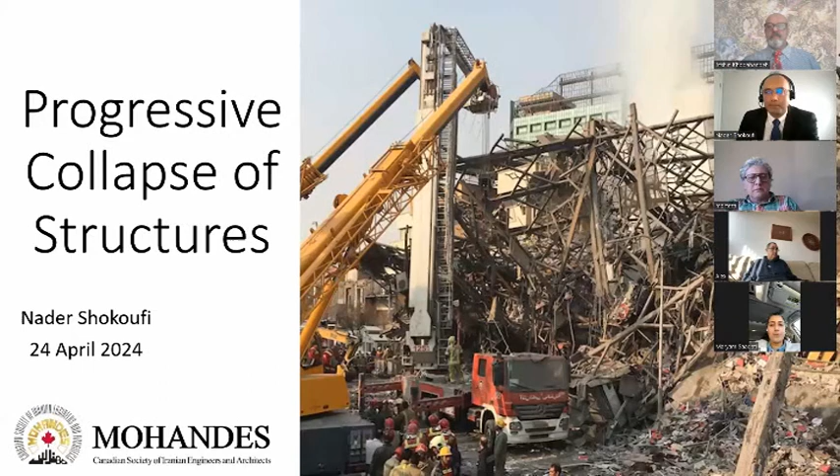I don't know how many of you are fans of crime TV series. Well, me, I'm a big fan. I've watched almost all crime TV series there are. And a common trend in these series is that there is a clever detective who goes around, gathers evidence, and finally, in a climactic moment, says, here's what happened.

Well, we have a similar approach when we're looking at a collapsed structure. We go around, gather facts, write some possible scenarios, do some analysis, and finally we would say, here's what happened. And from that, we learn some lessons that we will apply to our future designs, hoping to prevent a similar catastrophe from happening.

But that a posteriori approach is not all that we do. We also have an a priori approach in which we try to predict what might happen and prevent it from happening.

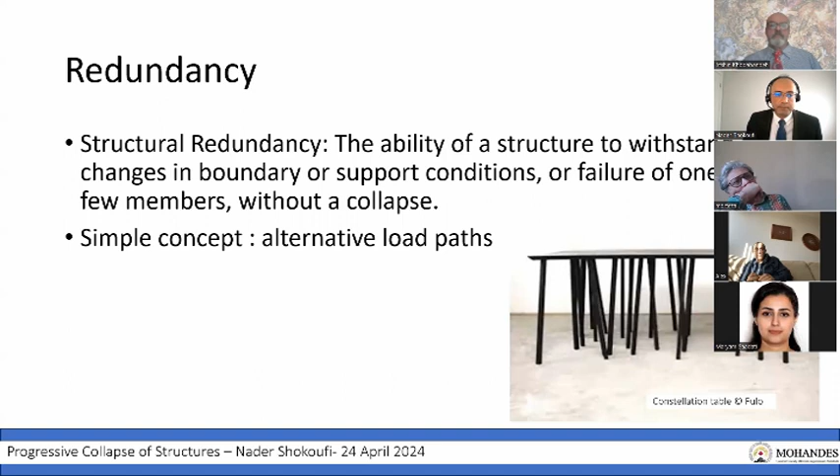I will be using the words collapse and failure a lot during this presentation, and I would use them sometimes interchangeably, but there's a slight difference between these two. So, for example, a beam that has been cracked beyond...

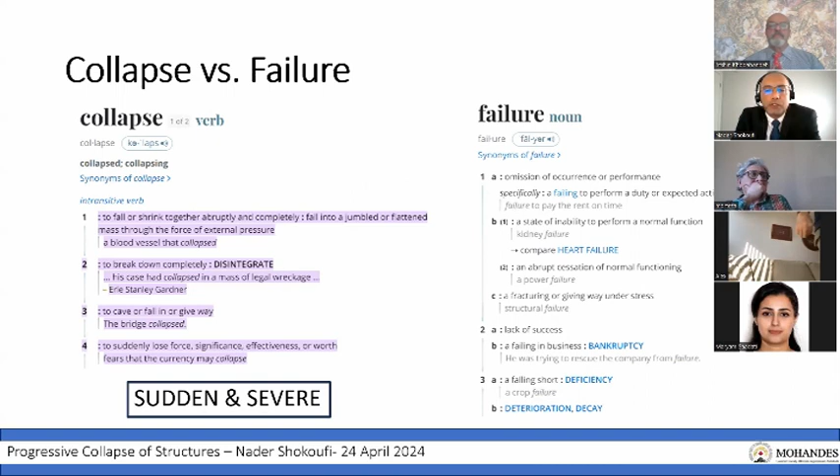There are different definitions, one from an AISC document and another from the GSA, the General Services Administration, both American institutes. Keywords of both definitions are that the final collapse is disproportionate to the triggering event, and that there is a sequence of collapses. The AISC defines it as collapse of all or a large part of a structure precipitated by damage or failure of a relatively small part of it. So it considers what triggers it as a small event, and there's a chain of events, some sort of butterfly effect, where a small event somewhere causes a very large result elsewhere.

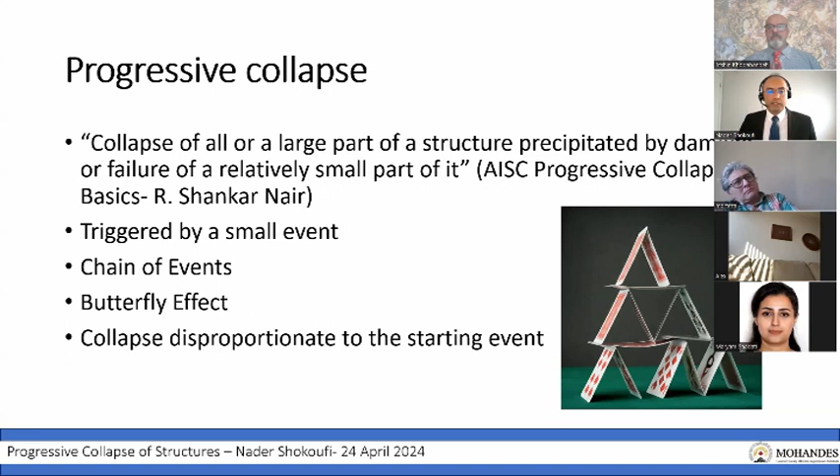The definition by GSA is very similar to that, and I will be quoting the GSA a lot during this presentation. It goes on to define progressive collapse as a situation where local failure of a primary structural component leads to the collapse of adjoining members, which in turn leads to additional collapse.

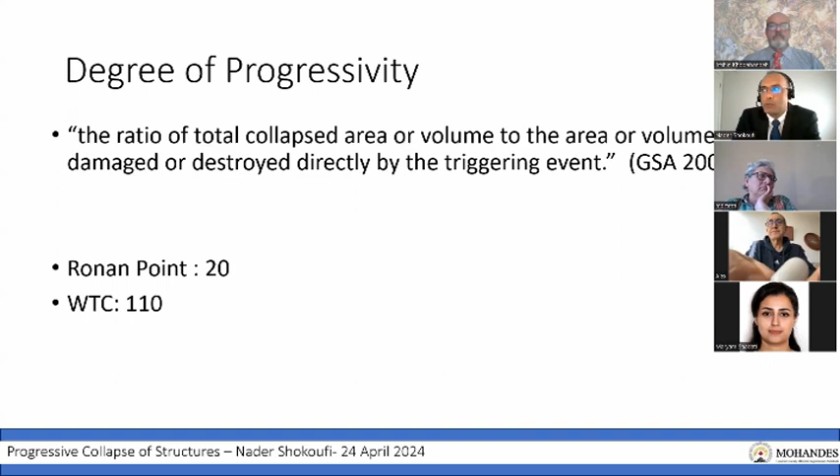I mentioned that a progressive collapse is one where the final damaged area is disproportionate to the triggering event. To measure the level of disproportionality, we define a term called degree of progressivity, which is the ratio of the final damaged area to the initial collapsed area. For example, for the Ronan Point building, which we'll see later, this degree is 20, and for the World Trade Center, also discussed later, it's 110.

Progressive collapse is not always avoided, and we sometimes look for it intentionally, especially for controlled demolitions. Here is an example of it. Unfortunately, I don't know where this structure is or what the original source of the video is—I just saw it somewhere on Instagram.

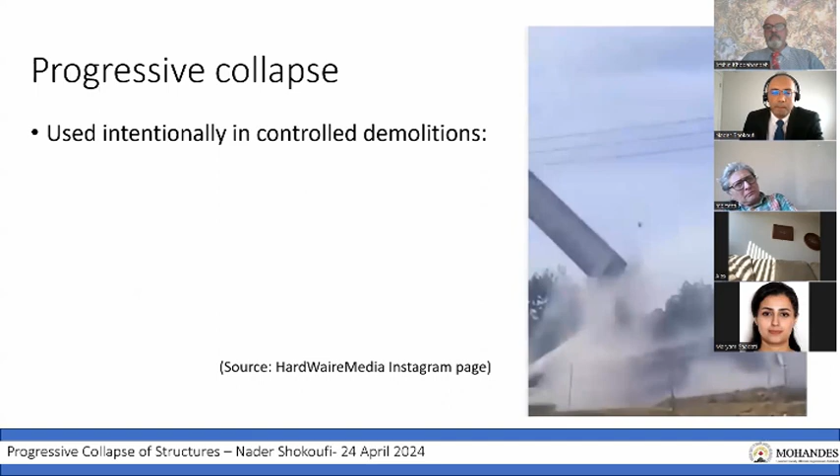But most of the time, progressive collapse is not that soothing side of intentional controlled demolition, and it's mostly a catastrophic event. I apologize for sharing this video, which might be a painful reminder for some of us of the horrific collapse of the Metropole building in Abadan, which resulted in 43 deaths and scarred the nation. I will not discuss the collapse in this presentation, but I will note that the incident mostly highlights the importance of professional ethics. Almost every stakeholder in this project, apart from the original consultant and partly the inspector, gravely neglected their duty to the public, and there were huge errors in design and construction of the project—errors severe enough to make the demise of this structure inevitable.

So I will now review some historic cases to help us understand what has happened and how we might be able to prevent similar events in the future.

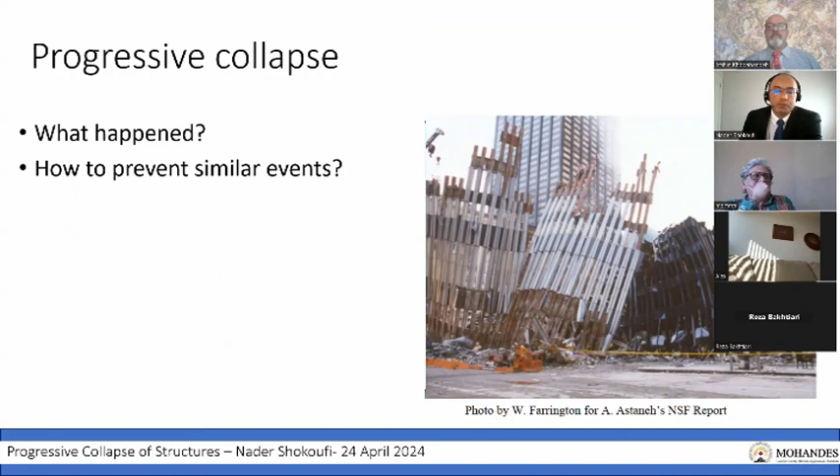But in real history, those of you who have traveled to Venice might have been amazed by the beauty of St. Mark's Square and its majestic bell tower. What you might not know is that this Campanile Tower was fully destroyed in 1902, and what we see today is not the ancient tower, which was nearly a millennium old, but a replica rebuilt in 1912.

The original tower took more than 200 years to be built to its current height, and it was built mostly as a watchtower. Later, in the 16th century, it was turned into a bell tower, and it was damaged several times during its lifespan, mostly because it was struck by thunder.

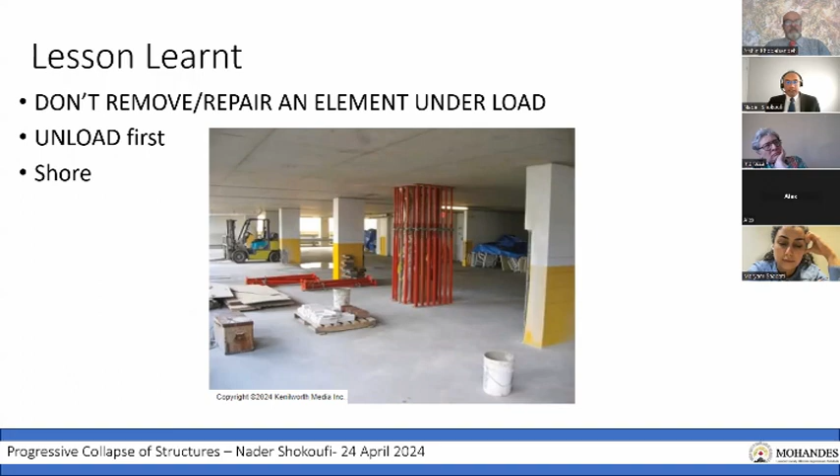The collapse of the zoology building of Aberdeen University in Scotland is the first recorded instance of a progressive collapse in a steel frame structure. The building was six stories tall, with a steel frame and concrete floors.

The collapse happened during construction, when a handful of construction workers were working on it during a severe wind. There were investigations by the Sheriff of Scotland and also the Parliament of England, neither of which I could find in the UK National Archive. But newsreels mention a summary of the report claiming that faulty connection welds were to blame for the collapse.

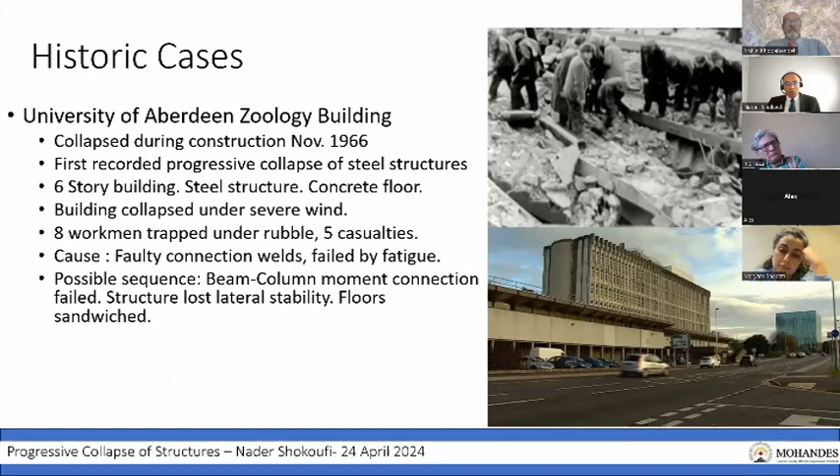I would have loved to see the official report for this collapse, because it seems curious how connections that experienced only a few cycles of loading during their short lifespan reached the point of fatigue failure. I also wanted to see if there had been any temporary bracing during construction that might have prevented the collapse. But it seems that if either of these two had been considered—temporary bracing, or connections designed for fatigue—this could have been prevented.

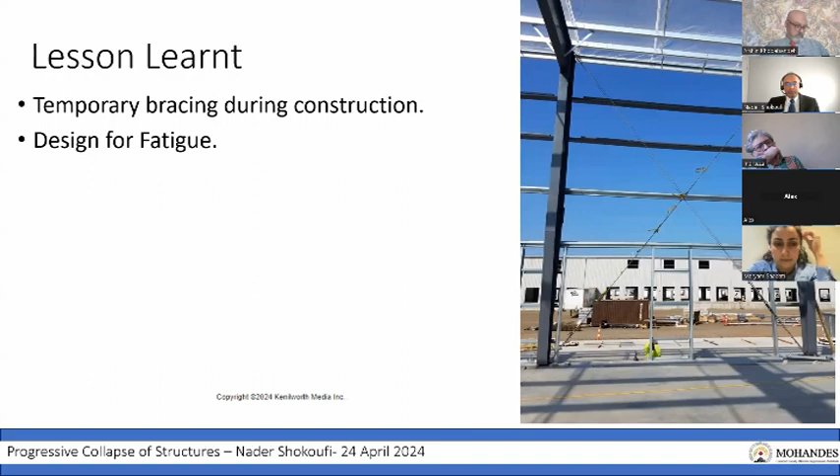This is the event that had a huge impact on the whole concept of progressive collapse: the collapse of the Ronan Point building in London in 1968. The building was a tall, 22-story residential building built with tilt-up large panel precast walls and slabs, and it was known at the time by the name of the Danish contractor company Larsen Nielsen.

They were the company that invented the system, and that system was used thoroughly all around Europe at that time, even till the 2000s. It was a perfect choice for that era, since almost a fourth of residential buildings in the United Kingdom were destroyed during World War II, and there was a dire need for mass construction of residential spaces. At the same time, a large workforce had moved into industrial jobs, leaving a shortage of construction workers.

So several buildings similar to this were being built all around the United Kingdom, five of which at the exact same time with the exact same design. The collapse happened just two months after the building was populated.

A small gas leak in the 18th story caused a small explosion in the kitchen. This explosion was so small it didn't even hurt the ears of the tenant who was there, or damage the kitchenware in that kitchen. But this small explosion blew out the precast wall on the southeast side of the flat, and losing their support, the upper floor walls dropped down one after another, so the weight of floors 19, 20, 21, and 22 all fell down onto the 18th floor and caused floor 17 downward to collapse.

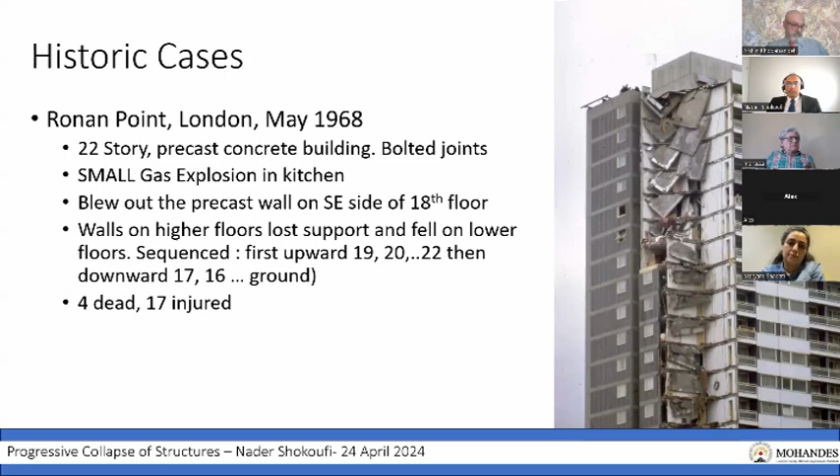It was lucky that it happened very early in the morning, and most of the tenants were sleeping in their bedrooms, which were on the other side of the building. And since the building had only recently been populated, some of the flats were still empty, so casualties were limited to four persons.

It was later shown in the investigations that the explosion was a very small one with a maximum pressure of only around 70 kilopascals. The problem was that the panels were not duly connected to each other, and they were supposed to be bolted and mortared, but due to bad workmanship and the lack of inspection, the bolts were not tight, and most of the connections were not mortared there.

And so, what happened is that the building was actually relying on the friction between the wall and the slab to stay stable. And that small explosion was enough to raise the roof a little bit, and losing the friction, the wall fell out and the entire building came down.

It was later shown that the building was designed to a wind load of 100 kilometers per hour. And at that location, at that height, winds of up to 170 kilometers per hour would have been expectable. So even if that explosion had not happened, the later strong wind would have caused the same collapse in the building. So the lack of interconnectivity of the panels and low redundancy of the system meant that there was no alternative load path when a single wall panel was removed.

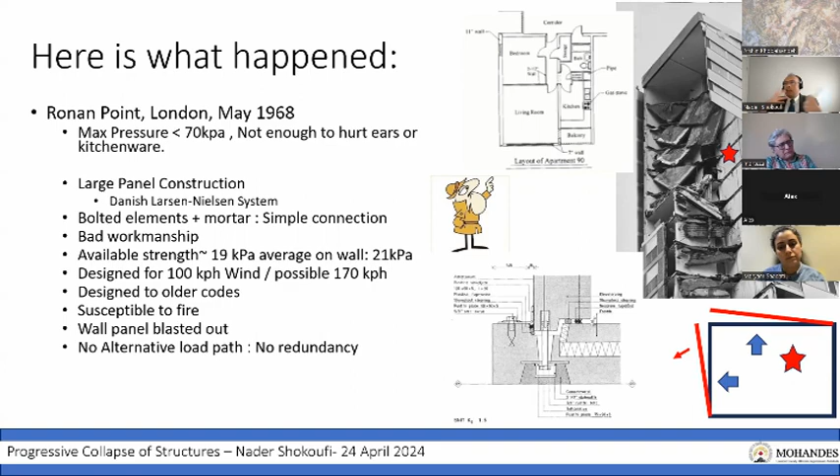Possibly the best documented building collapse in history is the collapse of the World Trade Center in 2001. And I apologize again if watching this video is too painful for some participants. What happened was that two Boeing 767s coordinately hit the two towers in upper floors, the north tower between the 93rd and 99th floor, and the south between the 77th and 85th floor.

The buildings stood the early damage of the plane impact, but later collapsed because of the fire from the planes' full tanks of jet fuel. The South Tower collapsed less than an hour after the impact, and the North Tower stood a little less than 2 hours. Nearly 2,600 people died in the incident, and that was an event that scarred the US nation and had long-lasting effects in many other locations around the world.

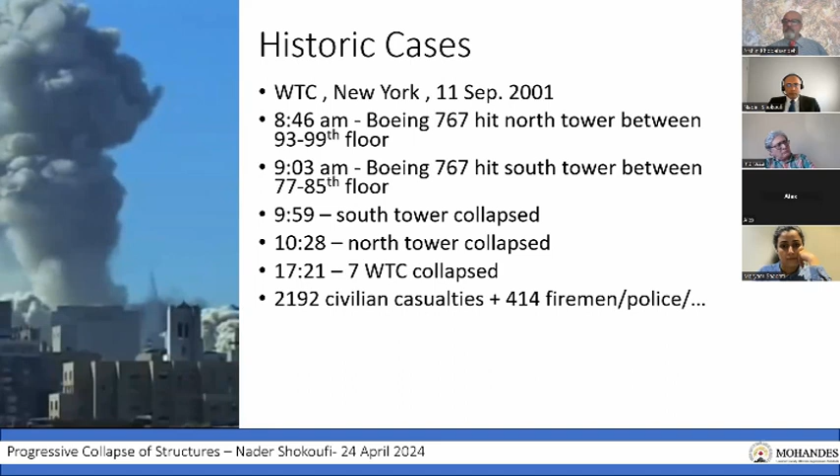So there have been several investigations done on this building, including one by Professor Abolhassan Astaneh that reported to the Congress, and other investigations by FEMA and NIST. Among them, Dr. Astaneh did not have access to the blueprints of the building, so some of his analysis was based on general information of this structure. NIST had more access to blueprints and construction data, so their report was more in depth.

And it was shown that the building was structurally designed to stand an impact by a Boeing 707, which is an airplane with similar size and load to the one that hit the building. And although it was damaged during the impact, it stood stable for 1 or 2 hours. What caused the collapse was that apart from the damage to the structural elements, the thermal insulation on the elements was damaged in the impact, which made beams and columns defenseless against the high temperature of burning kerosene.

And if you know, kerosene can have an open air burning temperature of more than 1,000 degrees, while steel loses its ability to carry loads at somewhere around 600, 700 degrees. So as the elements in one of the stories reached the plastic point, the upper floors crumbled down on the lower floors one by one, making the horrible scene of the domino collapse of the building you just witnessed.

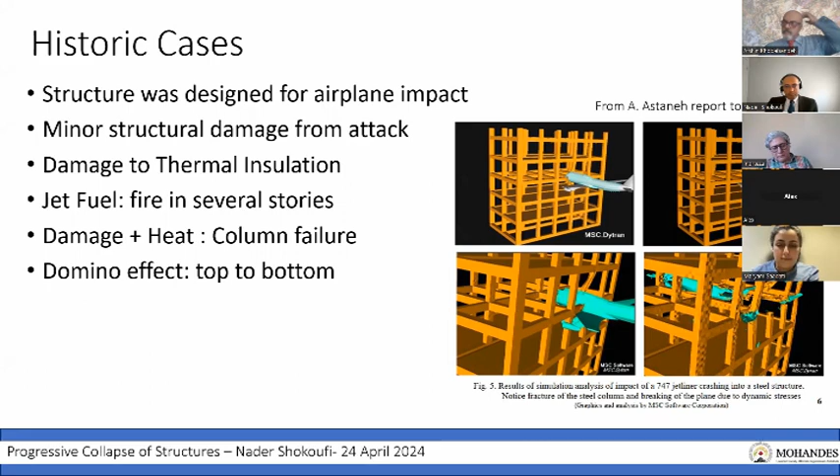A progressive collapse that similarly scarred the Iranian nation was the collapse of the Plasco building some 7 years ago, in 2017. It was once known as the most modern building of Tehran. Plasco was a 16-story tall steel structure that, for a short period, was the tallest building in Tehran. It was claimed to have a lifespan of 200 years, but unfortunately, it didn't make it to 60.

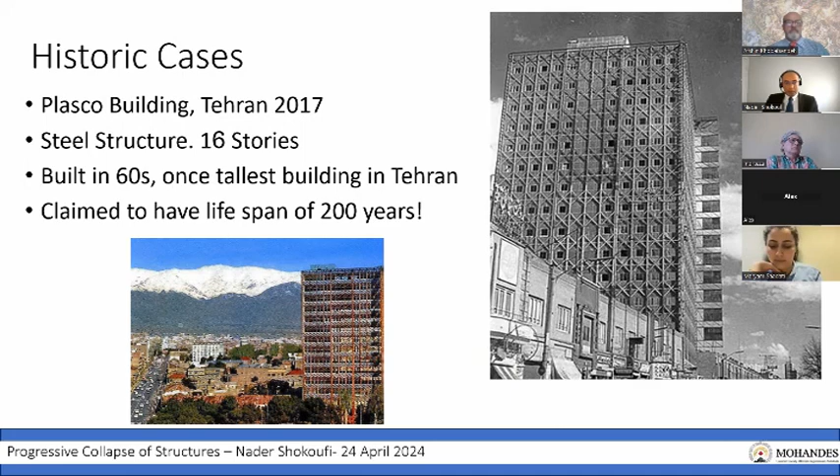Plasco building was made of two parts, a tall office building and an extended shopping mall beneath it that once used to be a glamorous place, but in later days it became a textile market. The office building was also mostly used as a storage or workshop for textile vendors in later years.

It was shown that poor maintenance of the building was a major factor in its collapse, as there were no working sprinklers, no firefighting equipment in the building at the time it collapsed.

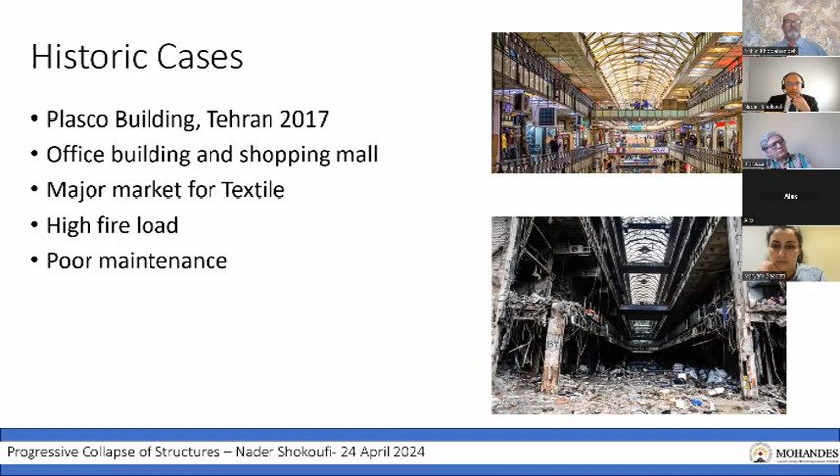The incident that triggered the collapse of the building was a fire, possibly because of electric wires, that started early morning on the 10th floor. It was lucky that it happened on a holiday and no shops were open that day. No shoppers were inside it. But the building was full of textile, so the fire spread rapidly.

Firefighters tried to stop the fire from spreading, but the building finally collapsed after nearly 3.5 hours of burning. And it took 16 firemen and six civilians in what became a long period of mourning in the country. This is how it happened.

First, the northwestern part of the 11th floor above the initial fire at the 10th floor collapsed, followed by the collapse of the same location in the 12th and 13th stories 10 minutes later. And then half an hour later, the 10th floor collapsed almost fully on the 9th floor, and in quick succession from there to the ground.

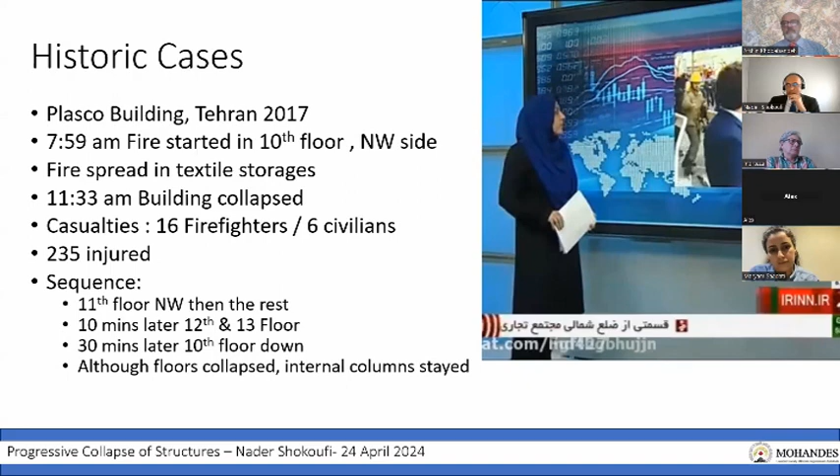And although I know it's painful to watch, please watch this video carefully and notice how the internal columns stood when the floors were falling down. You see that those columns in the middle, they're standing still.

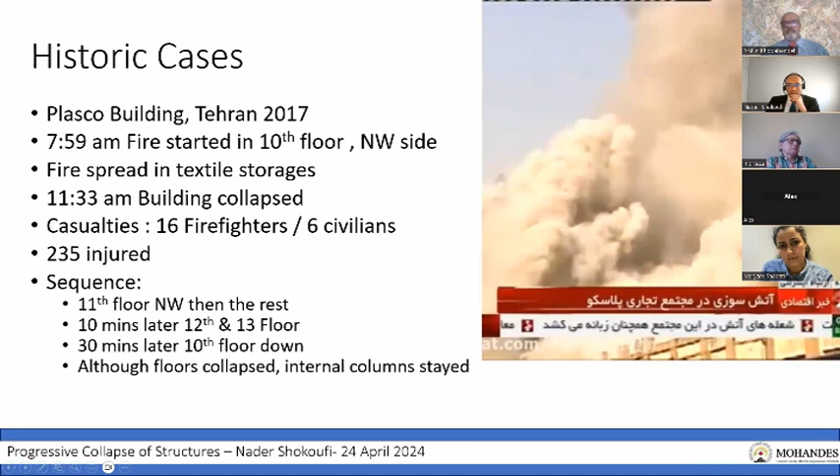And here you can see the collapse of the building from another angle. And this better shows how the floors collapsed one on top of the other.

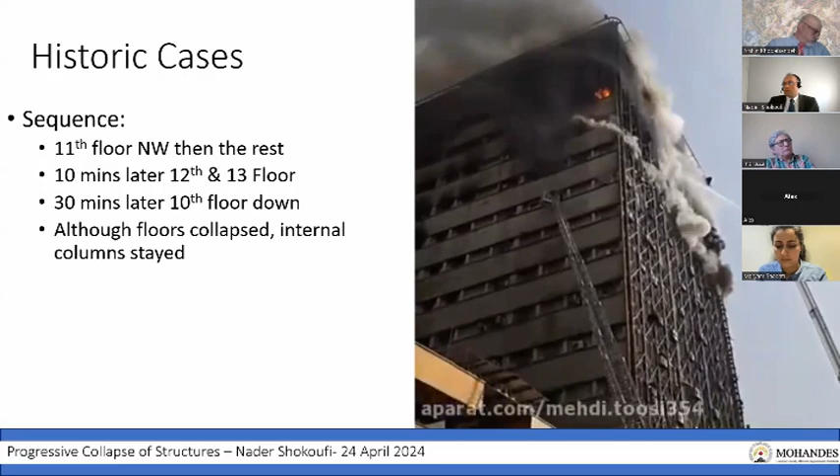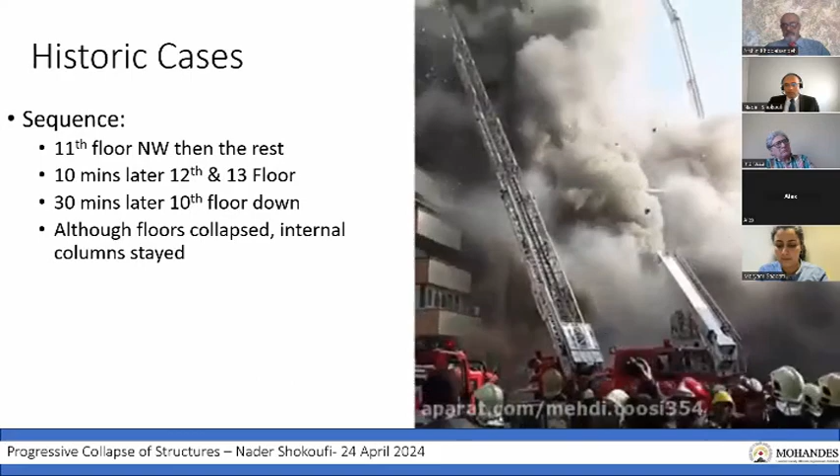The investigation showed that the building elements were all built-up sections, and the perimeter columns were two channels connected with plates at intervals, and the four internal columns were built by four channels connected with interval plates.

The beams were mostly trusses connected in a manner that once was customary in Iran, known by the name of khorjini or saddle connection, and it was still used when I became an engineer in my early years of working, but fortunately, it's now extinct.

And what happened was that there were no fire or smoke barriers in the building, no fireproofing covers on the structural elements, and the poor maintenance of the building meant that there were no sprinklers and no working firefighting equipment.

Studies showed that the first elements to collapse were those small angles under the trusses, because they were the thinnest steel elements in the building. So they lost their load bearing ability. The trusses fell down and the floor fell down, and that is why you see that the floors were falling down while the columns were still standing.

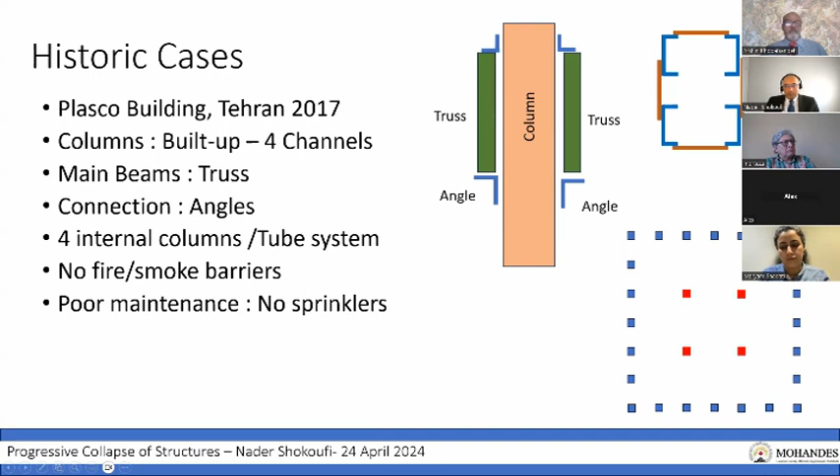So let's get to the most recent case at hand, that is the collapse of Francis Scott Key Bridge in Baltimore. The bridge was named after an American lawyer and poet who is the author of the lyrics to the Star Spangled Banner, that is the USA national anthem.

The bridge is, or rather was, an important infrastructure with not only local but also national importance, as the waterway is the path to the Baltimore port, one of the top 20 busiest ports in America. It is estimated that the port handles more than 50 million tons of cargo, worth more than 80 billion US dollars each year.

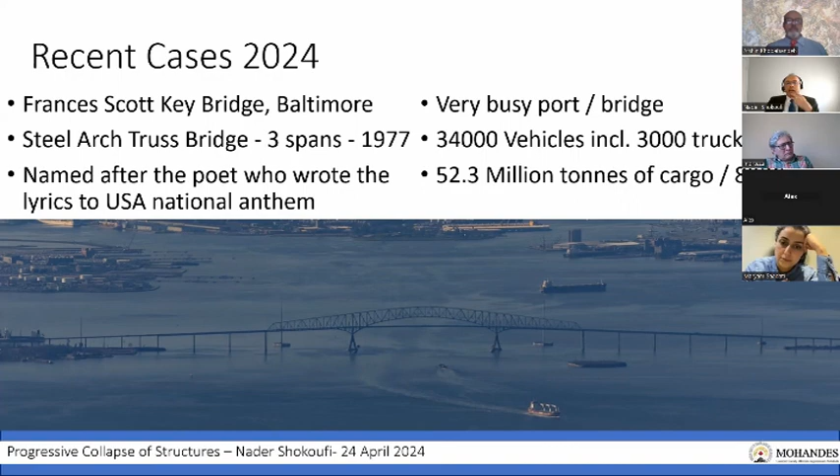To get a scale of this number, you might note that the Port of Vancouver, the busiest in Canada, manages around 120 million tons, a little bit more than two times the Port of Baltimore. The bridge itself connects the city to an industrial area and a county of more than 500,000 population. And more than 30,000 vehicles pass the bridge daily, including 3,000 trucks.

The collapse of the bridge was the result of it being hit on the southwest pier by a container ship named Dali. That is a medium-sized ship by today's standard, but still a huge ship with gross tonnage of more than 91,000 tons. The ship, owned and operated by Singaporean companies with Indian crew, left the port a little after midnight, and it had some repairs the previous day at the port.

A few minutes after departure, it went into a complete blackout that left it both without a working engine and without navigation. The captain sent out a mayday call and dropped the anchors in an effort to stop the ship, but notice the huge momentum of a 91,000 ton ship, and notice that when we are in the water, there are no frictions to stop any movement. So ships tend to go in a straight line, and stopping or changing their direction needs a lot of effort.

Following the Mayday call, the traffic was stopped on the bridge, first on the north lane at the same minute as the Mayday call, and the south lane a minute later. Fortunately, there was almost no passing traffic when the bridge collapsed, but there were 8 construction workers doing some repair job on the bridge, and they just stopped working and did not leave the bridge. And so at 1:28, when the ship hit the southwest pier, the bridge collapsed in a very quick succession of events. And out of those 8 workmen, only 2 survived.

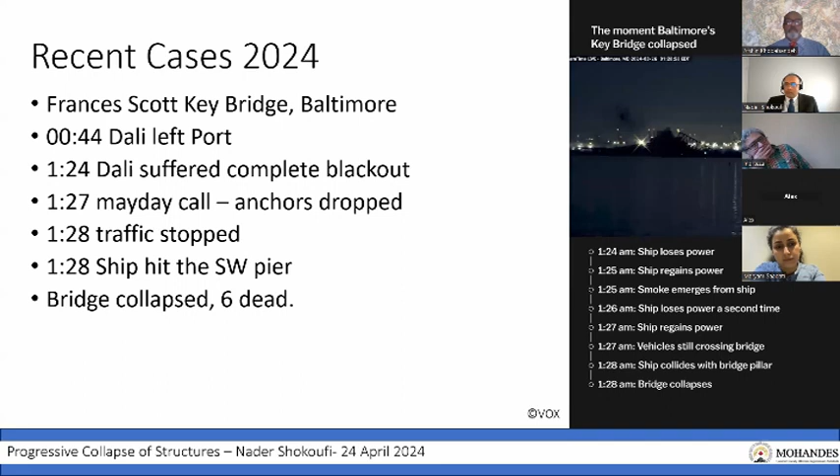So here's what happened. First, I suspected and argued that the sequence of failure started by the southmost support of the steel truss having moved out of the concrete pier and fallen down. But watching several other videos of the incident proved me wrong. So the first thing to happen to the bridge was the collapse of the southern pier. And this caused the truss to have a much longer span and also the middle span to lose its arch action. The combination of losing the arch action and having a longer span caused two elements on the southern side of the bridge to fail.

And this meant that the bridge was then acting like a cantilever from the northern pier, which it couldn't bear that much load. So top elements on the bridge near the northern side then failed, and this made the bridge fall down in the middle and the southern side. But also the kickback of this fall made the northern span not only fall down but also hit the concrete spans behind it, and so there were also three concrete spans falling down after this collapse.

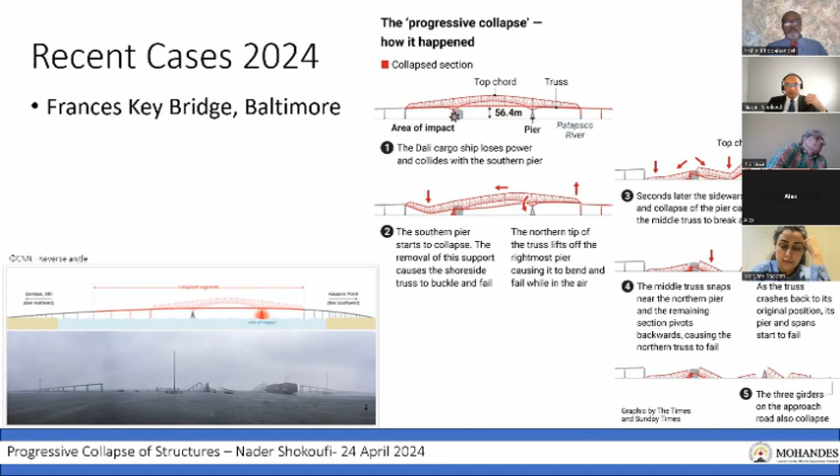It is too early to give a definitive response on why this happened. But two things are obvious. First is that the ship size and the load during the design and construction of this bridge in the 70s was much smaller than what we have today. And it might be the reason behind the dolphins looking too small compared to the ship. And the incident also happened at midnight, which is the time of the high tide, and the water level is too high, making those small dolphins even less useful.

But it shall be noted that there are very few structural options we might have for bridges passing over such wide waterways, and it might not be possible to provide enough redundancy or reserve strength to stand the huge load of that impact from a ship. And I guess that the possible aftermath of this accident might be more emphasis on fenders, dolphins, or protective islands around the piers of major bridges.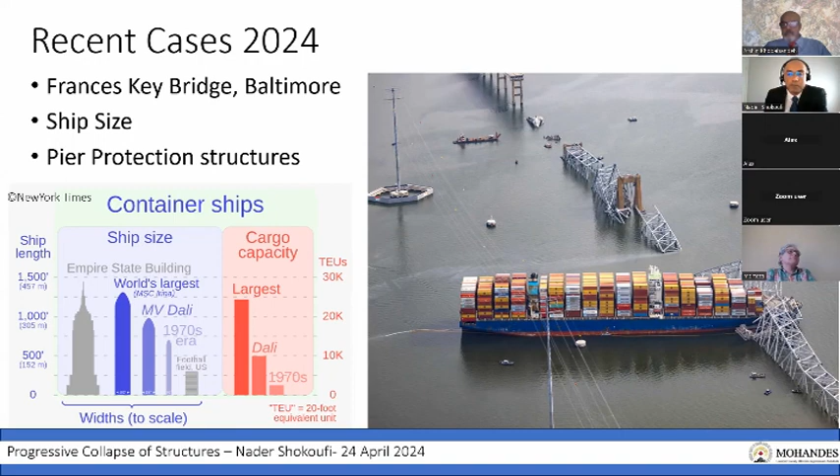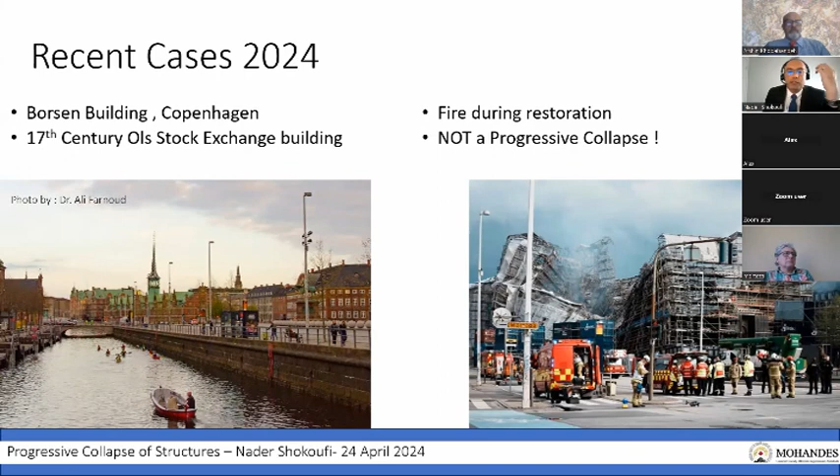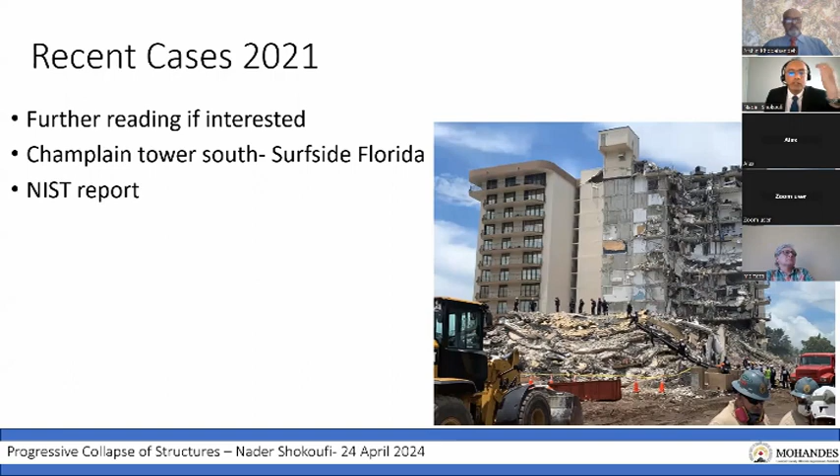If you're interested in this subject, there's a very in-depth report on the collapse of another building, Champlain Towers South in Surfside, Florida, that collapsed a few years ago. The report is by NIST, and it follows the incident second by second thanks to the many security cameras that were in and around the building. And it shows how the collapse of a pool deck over the underground parking caused a domino effect on the columns of the building that finally brought down big parts of the building, killing nearly 100 residents.

So enough of these horrible accidents. Let's take a look at what we can do to prevent it.

In Canada, as far as I looked, I didn't find a specific code or guideline for the prevention of progressive collapse, and it is assumed that some general phrases in NBCC and design codes will provide enough provisions to prevent it.

But there are two major publications directly focused on this subject in the USA: one by the General Services Administration, which oversees the design of public buildings, and the other by NIST. The U.S. Army and U.S. State Department also have guidelines for the design of military facilities and embassies. Later in this presentation, I will mostly quote the GSA guideline, the one on the left.

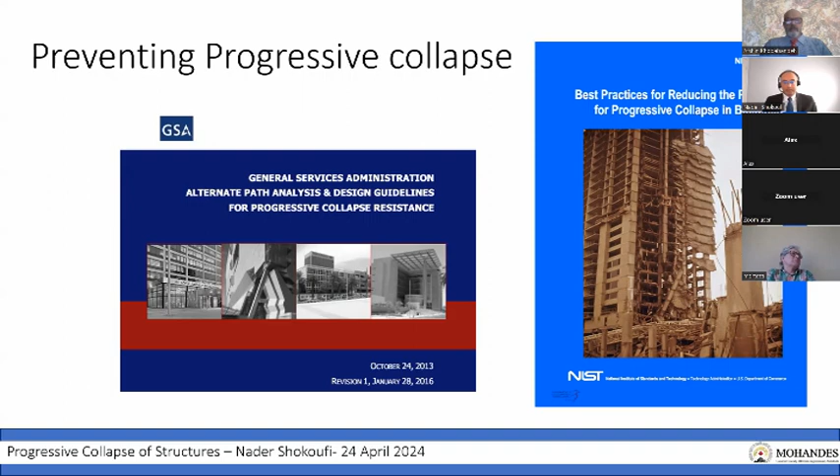Generally, there are four paths to preventing a progressive collapse and to encase an initial incident to a local limited collapse. The first is...

to add redundancy and alternative load paths to the building, and this is what is emphasized by most guidelines and codes, including the GSA and Chapter 21 of Iran's National Building Code. Some other codes, including that of the U.S. Army, look for more additional strength and ductility, and those like ACI 318 or CSA A23.3 mostly focus on interconnectivity and integrity of the structure.

But it shall be noted that in some cases none of these structural measures would be enough, and we would need some non-structural measures in place.

Generally, redundancy is to have alternative load paths, so when some of the structural elements fail, there are others to cover for them.

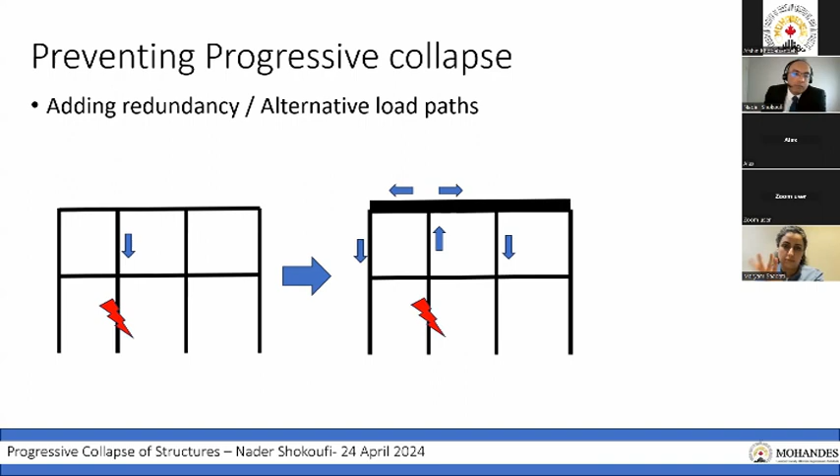You might notice in one of the early pictures of the Ronan Point building that although the roof slab lost its support that was being provided by some walls below it, it's still kept stable by the cantilever effect of the parapet walls on top of it.

This alternative load path is what is required by GSA and Chapter 21 of the Iranian Building Code. I should add that the seismic codes of both the United States and Iran have a redundancy factor, a punishing factor of 1.2 or 1.3 for buildings that lack enough redundancy. That factor is not seen in the NBCC 2020, although there are some measures of it for irregular buildings, but that doesn't directly address the redundancy of buildings.

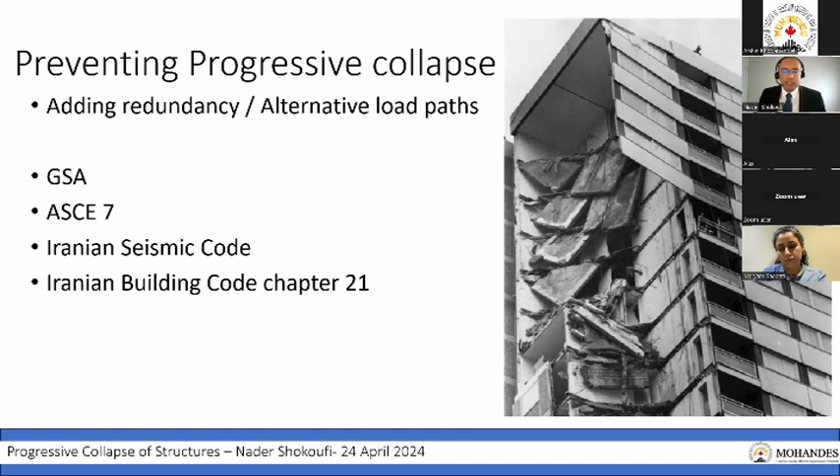So the presence of these measures of redundancy, integrity, and reserve load bearing capacity has shown to be successful in preserving the overall stability of the building.

The picture shows the building known as the Bankers Trust Building, currently a Deutsche Bank, in New York, which was just adjacent to the World Trade Center building. It was hit hard with debris from the World Trade Center, and although it lost some of its structural elements, it stood still.

Here's what the GSA guideline says about redundancy: it asks for an alternative load path in a way that removal of any single element will not cause a collapse in the structure. A similar provision is mentioned in Chapter 21 of the Iranian Code, the so-called Padafand Ghair Amil in Farsi.

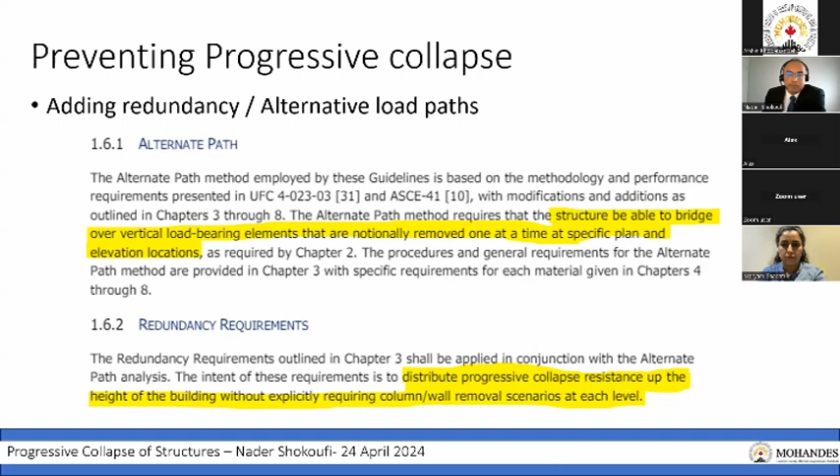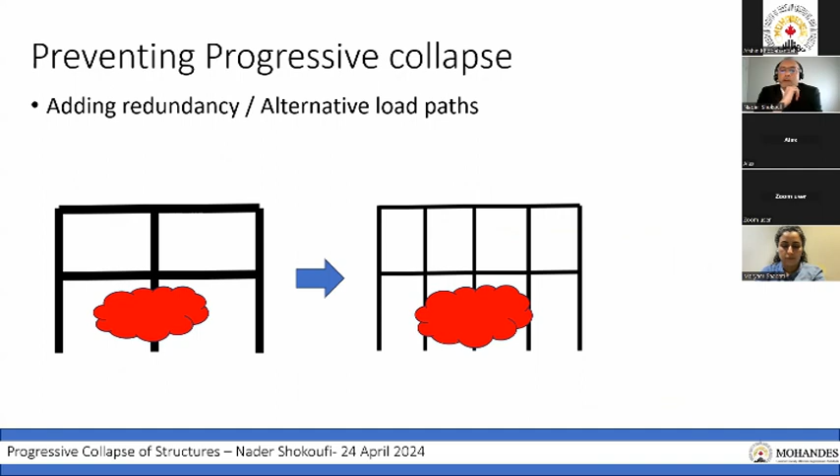Some claim that this might result in having more structural elements located in shorter spans. Although this is a good idea generally, it shall be noted that in some cases, like the bombing of the Alfred P. Murrah building in Oklahoma, this wouldn't have been effective.

What happened in the 1995 bombing of the Murrah Federal Building was a van full of explosives driving into the building, taking out a major column that supported a supporting beam on which the columns of higher stories were sitting. You can see a part of the frames on the right side of the picture, and I highlighted them in red on the right copy of the building. Excuse my lousy drawing skills.

It was first suggested that having more columns, like adding the one I showed in green, would have prevented the collapse. But it was later noticed that the explosion was so large that even if there were more columns more closely located, the blast would have taken out several columns at a time, bringing the same results.

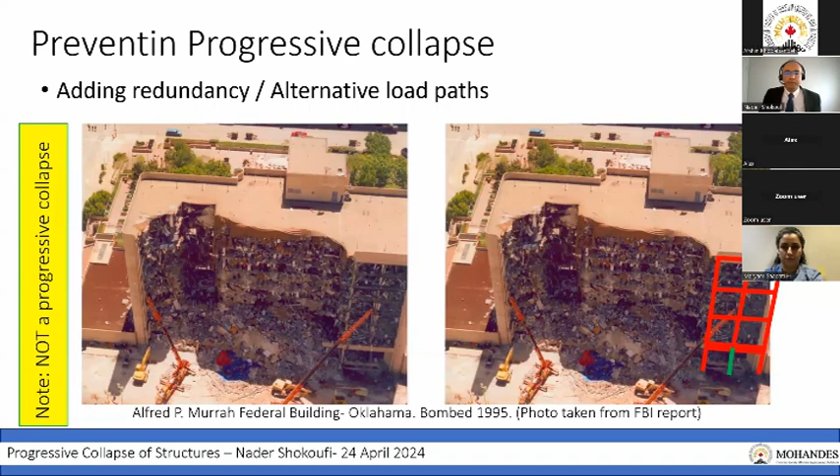There have been extensive studies of the World Trade Center collapse, and they have shown that the building was well equipped with all we have spoken of. The outer tube of the building was highly redundant, extremely well interconnected, and had a very high level of ductility. The problem was that the load of the fire was too much for the structure to stand.

There was nothing a structural engineer could have done to stop it. The very fact that the building stood after the impact while bearing damage to some of the structural elements is a good testimony to this claim.

A solution noted by both the GSA and the US Army is to have reserved strength and ductility, mostly to face the consequences of a blast. The provisions are very similar to those in seismic design, asking for better confinement of concrete, especially at locations of possible plastic hinges, and a stricter check of brittle fractures.

In this photo, you see a residential building in the Bronx that collapsed in December 2023. You can see how additional load-bearing capacity of the roof slab helped it remain stable even after losing one of its supports. The incident is a painful reminder of the consequences of engineering negligence. The engineer overseeing the restoration labeled a load-bearing column as non-load-bearing and approved its removal, resulting in the collapse.

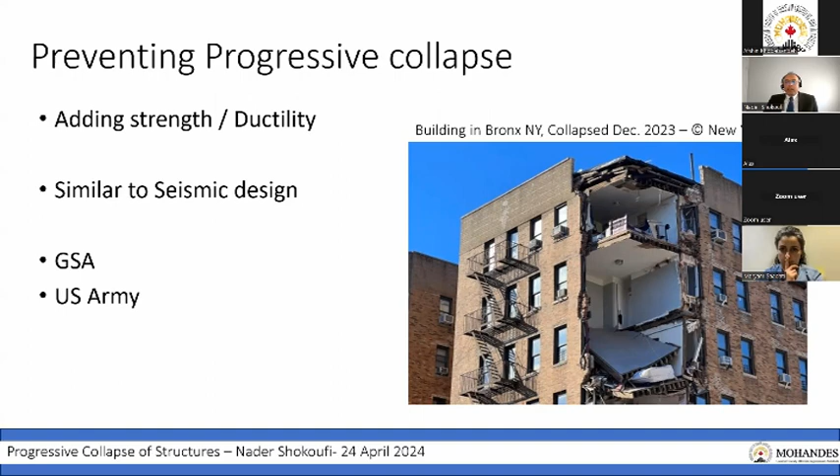We can see many examples of how this reserved strength and ductility has been helpful in keeping a building stable in the face of an accident. This picture shows the aftermath of the 1993 bombing of the North Tower of the World Trade Center. A car bomb, not unlike what exploded at the Alfred P. Murrah Federal Building in Oklahoma, blasted part of the underground levels of the tower. The terrorists' intention was to cause the full collapse of the North Tower so that it would smash into the South Tower, destroying both. Fortunately, that didn't happen, and the structure was strong enough to only experience limited damage to the underground area without any major effect on the overall structure of the building.

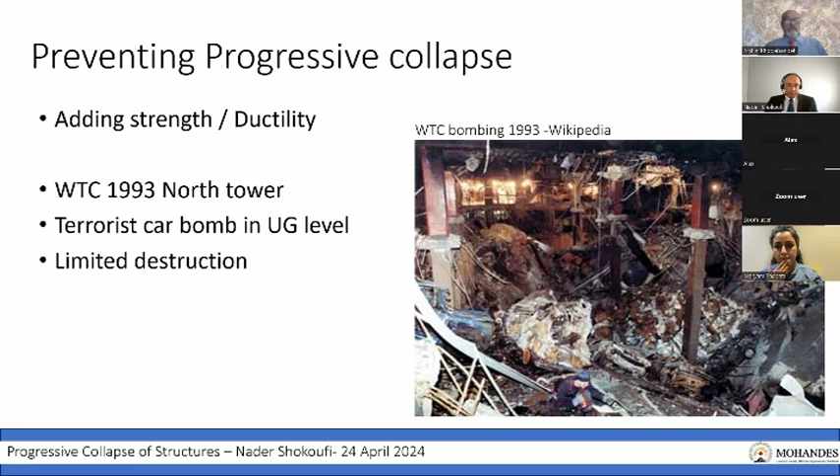As I told you, Canadian codes mostly talk about integrity. Here you see NBCC 2020 and its commentary. The National Building Code of Canada asks for the building to have sufficient integrity, and the commentary defines integrity as the ability to absorb local failure without widespread collapse. NBC doesn't go into detail of how this might be achieved, and it might be because Canada, being a relatively safe country, the Code Authority is not worried about terrorist attacks as American authorities are, thus the phrase 'may reasonably be expected.'

Sorry, what happened?

I was saying that the phrase 'may reasonably be expected' does not cover extreme situations such as bombing or terrorist attacks, as those incidents are not reasonably expected here.

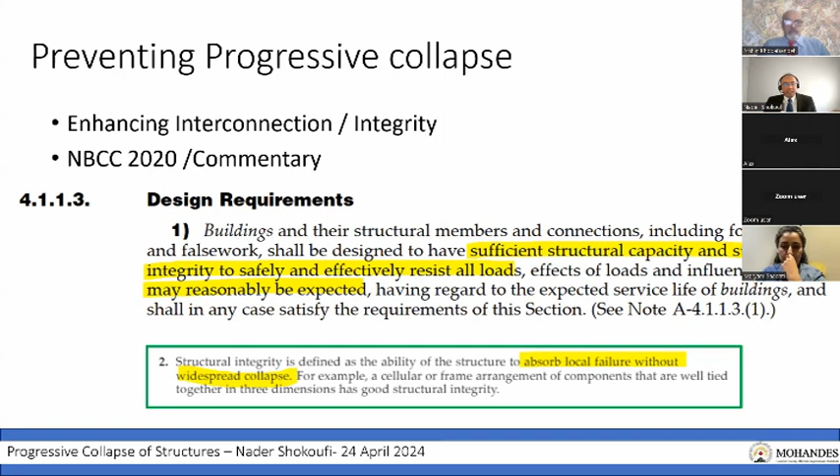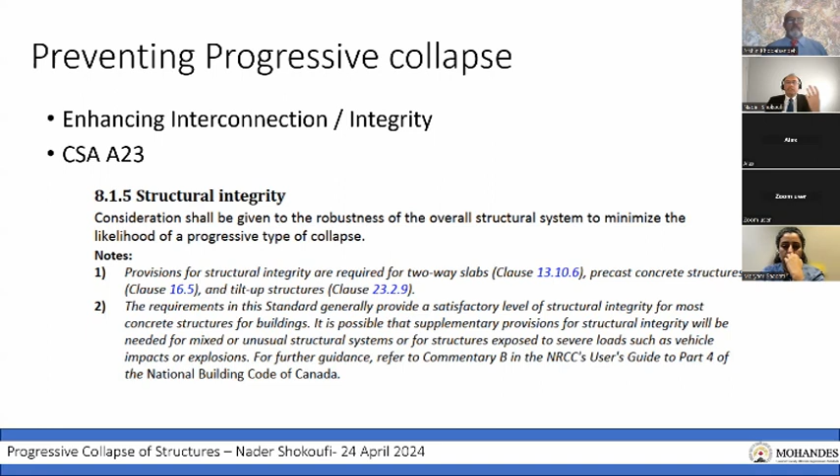The Canadian design codes also cover provisions for integrity. Here you see the relevant phrase from CSA A23.3 for the design of concrete buildings, where it mentions integrity and focuses on slabs, precast structures, and especially tilt-up structures. It is expected that with these provisions we will not experience collapses like Ronan Point. The collapse of Ronan Point and the deficiencies of many tilt-up precast structures in Europe have affected the CSA to have a special focus on these structures.

The provisions ask for better interconnectivity of the panels and effective ties between the elements. It especially addresses the base fault of the Ronan Point building by defining a minimum out-of-plane and horizontal load on the connections.

There are many occasions where structural measures are not enough, as the cases of the World Trade Center and the Baltimore Bridge, and even to some extent the Glasgow building, show. That is, when we face an extremely large blast, an extremely heavy load, or a long burning fire. In those occasions, we need non-structural measures like fire barriers, firefighting equipment, barriers that prevent explosive devices, or barriers that prevent collisions.

In this picture, you can see clearly how this is considered. This is the Sunshine Skyway Bridge in Tampa Bay, Florida. The bridge on the right is the old Sunshine Skyway Bridge that collapsed in 1980, an incident not unlike the one at the Francis Scott Key Bridge in Baltimore. A large ship hit the bridge at the pier, and the central truss collapsed. When they built the new bridge on the left, finished almost 7 years later, they included a lot of protective measures. We see huge dolphins there, and protective islands around the main two piers in the middle of the road. I think this is what will be the norm for waterway bridges from now on.

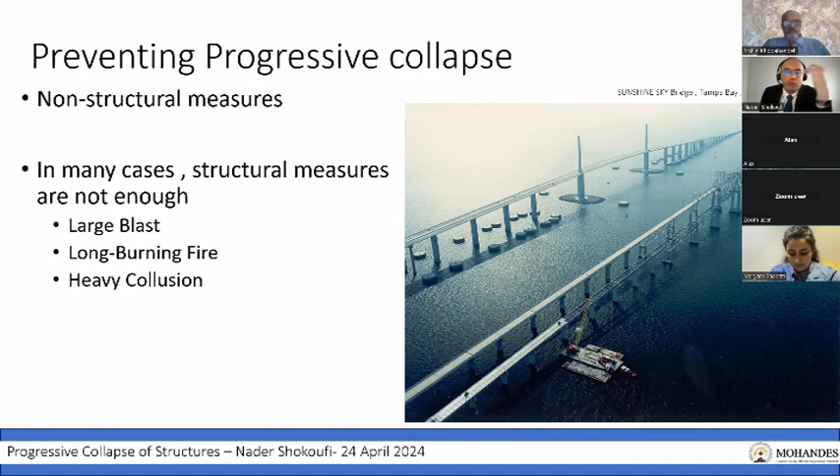So you might wonder why at the beginning of this presentation I talked about resilience and how it relates to progressive collapse. This is where our main responsibility as an engineer comes to light, and that is to keep public safety paramount in all we do.

Look at the example of the Francis Scott Key Bridge. There were thousands of cars and trucks passing this bridge daily, including some trucks carrying hazardous materials that would otherwise be unable to use the two tunnels at this location. There were also 80 billion dollars worth of cargo passing through the waterway that now needs to be rerouted to other ports.

This drastically affects the local economy. The bridge was the main access to the Hawkins Point industrial area—probably the only access to it—and also the main access to Anne Arundel County, with a population of around 600,000 people.

The reconstruction is going to take around 7 years and at least 400 million dollars. But if you follow the news, you'll know it's going to take many more years for the politicians to include the budget and sign the permits. By then, the costs will have risen several-fold, like what we recently saw in Quebec with the bridge connecting the Île d'Orléans to the mainland.